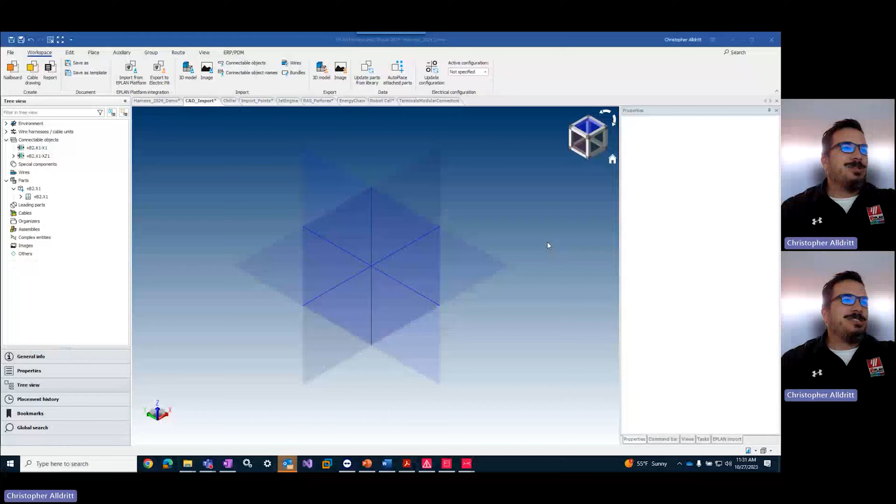So we'll start with the basics. When you start Harness, you start off with a nice blank space, and the first thing you want to do is import some CAD. So bring in a very simple CAD drawing, just a basic cube design. And we have our cube, our quad cube, and we want to start routing parts around inside of it. So we'll go and grab some parts.

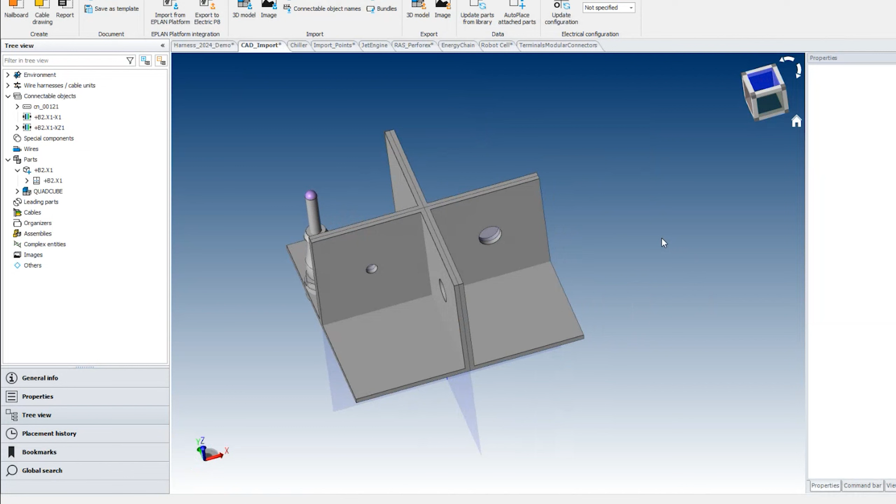Our library, which is connected to EPLAN's library, allows us to bring in parts directly from the data portal to P8 and then directly to Harness. And now with the advent of the LPM product, we can skip P8 altogether and bring in parts directly from the data portal to LPM. Wow. And then eventually to Harness. So we have this, and now we want to add a cable.

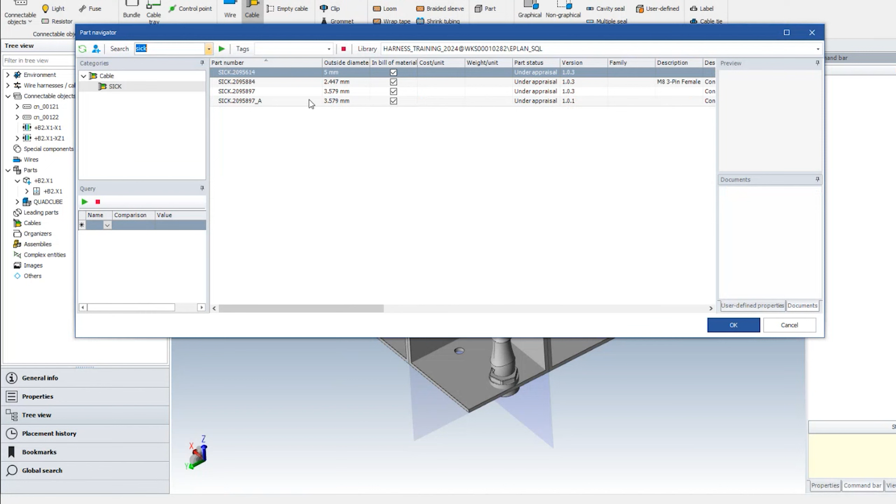Let's bring in a cable, place cable, and let's look for a nice SICK cable. Connect here, connect there. And so now we're immediately given a dialog asking us which wires on this connector side, what coded, which wires on this connector side. We've got brown, white, blue, and black attaching to the connector pins on both sides. Click OK, and now we've got a cable.

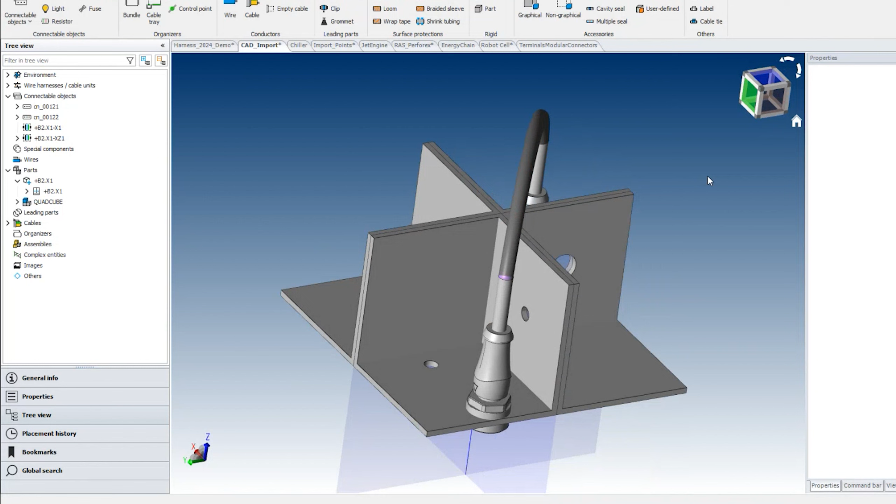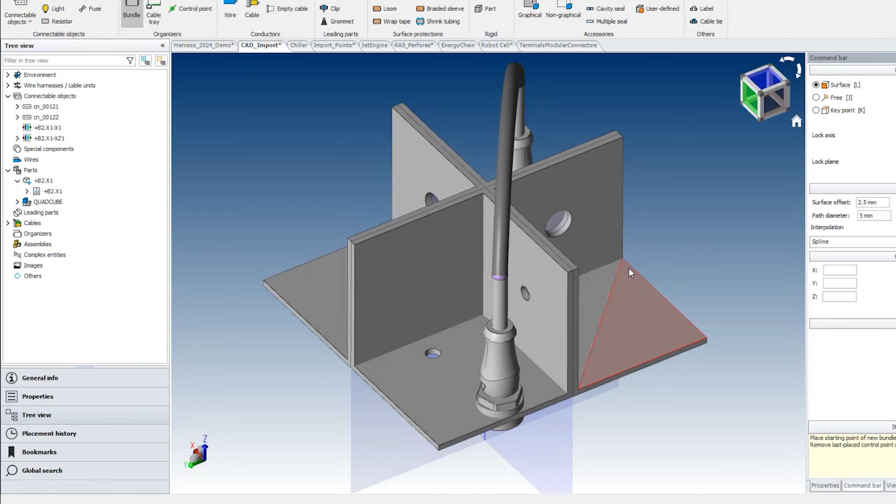That's wonderful, but now we eventually have to get it through all the twists and turns inside this little quad cube. So we'll introduce what's called a bundle. A bundle is a virtual path which allows us to guide our wires and cables. So we'll start with a bundle, and we'll place the first bundle point on the surface here and just work our way through the design. And then let's go way up and see. All right, so now I've created a very basic bundle.

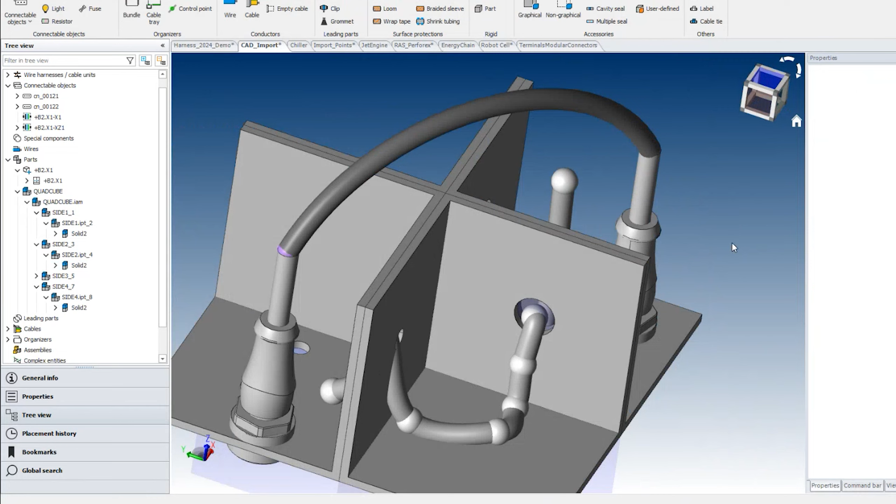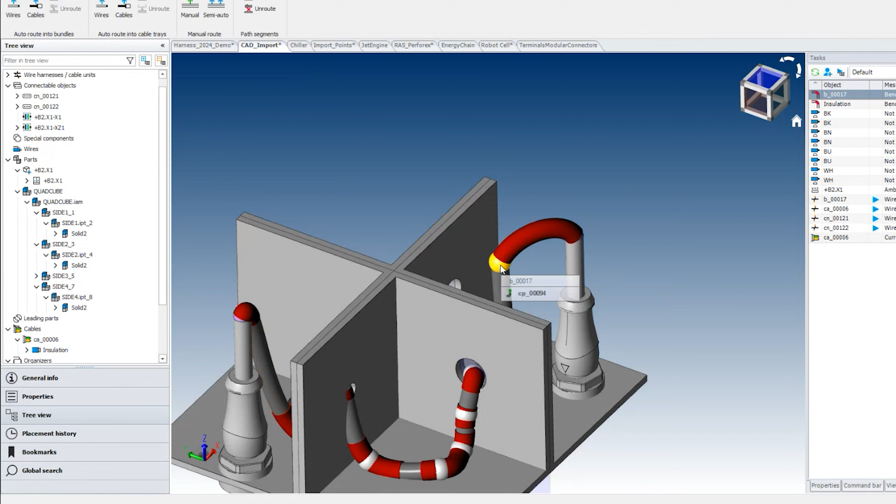So now we want to route this cable through that bundle shape. We'll go to the route and then just click auto route into bundles with a cable, and then it automatically links. Now, because I did this in a hurry, I've got a bunch of little errors telling me that I've exceeded the minimum bend radius of the cable, and I can tell that by going to tasks and running the task report: bend radius exceeded, not connected to any pin, not connected to any pin. Chris, you've done it all wrong. So you can go to each individual point and solve that by correcting pins, making sure that the red goes away. All right, so that is the very basics of Harness.

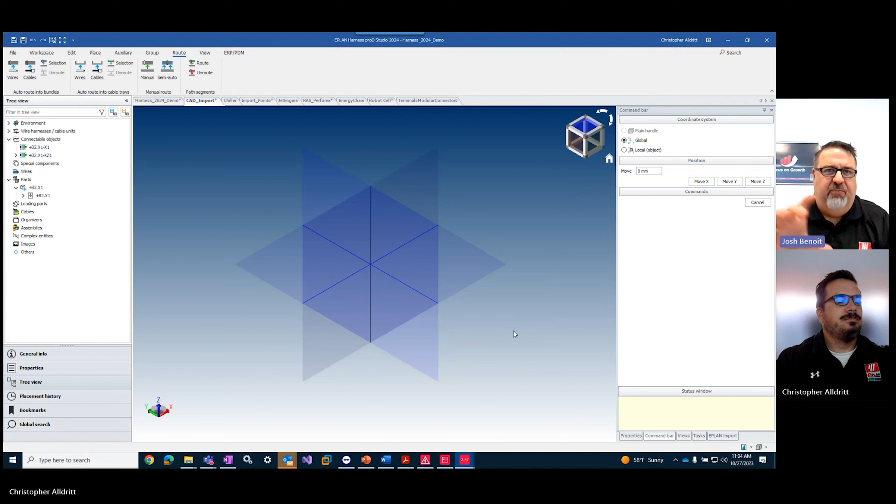So can I ask you this? Being a person that's never used Harness before, whenever you had those little points that you could pull up and down, are those automatically generated? Those points, I don't even know what they're called, but it seemed like that was the actual point where you can manipulate that wire. Are those automatically generated, or can you insert those in different places?

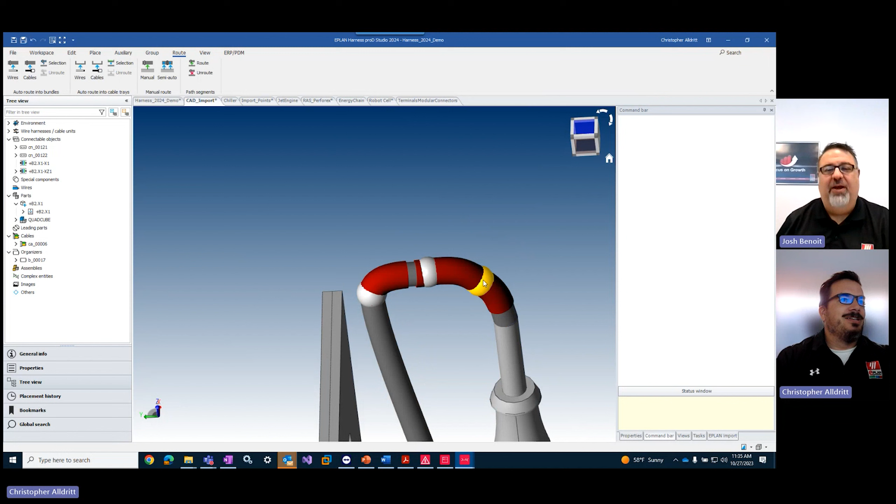Josh, I'm so glad you asked me that question. I cannot tell you how much. These are called control points, and you can add as many control points as you want to, and you can get an idea of where you are in space with the little online annotations that pop up, and you can drag and twist and run points everywhere.

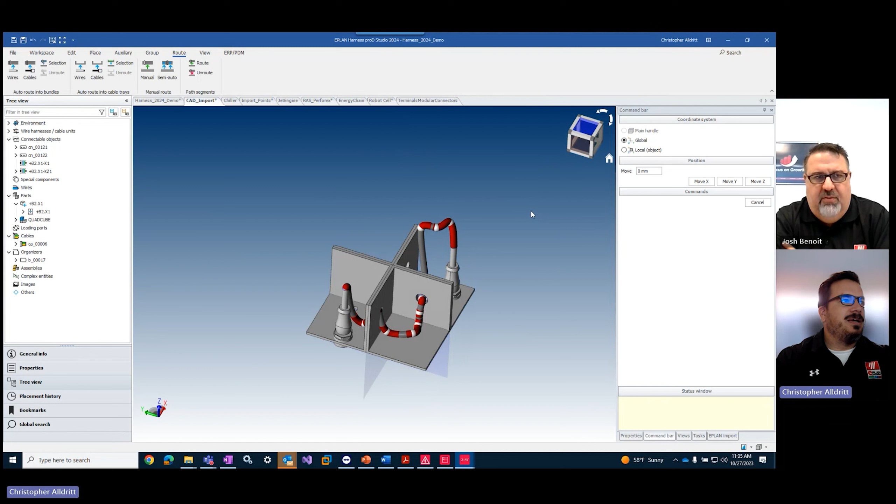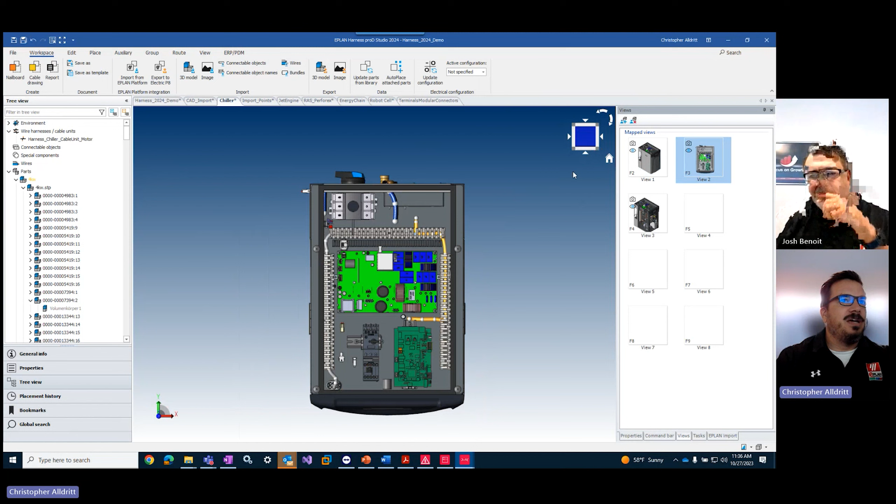Okay. So eventually what you're going to do is move on to something a little bit more sophisticated, like say a chiller unit. So we have a chiller unit here. And what we would like to do is run some cables through this chiller unit. To get a better look at this chiller unit, we'll access one of the views available to us. This is what it looks like from the top. And what I would like to do is run cable from here, down here, and eventually down to the motor.

Okay. So instead of using connectors from the library, what I'm going to ask Harness to do is link to an existing EPLAN project.

This is the ESS sample project harness chiller. So it's designed to make sure that I don't screw up. I'm going to defeat it anyways and probably embarrass myself. But to start out, we're going to take a look at the basics of what's going on inside this harness unit. So in EPLAN or P8, this is the P8 schematic program.

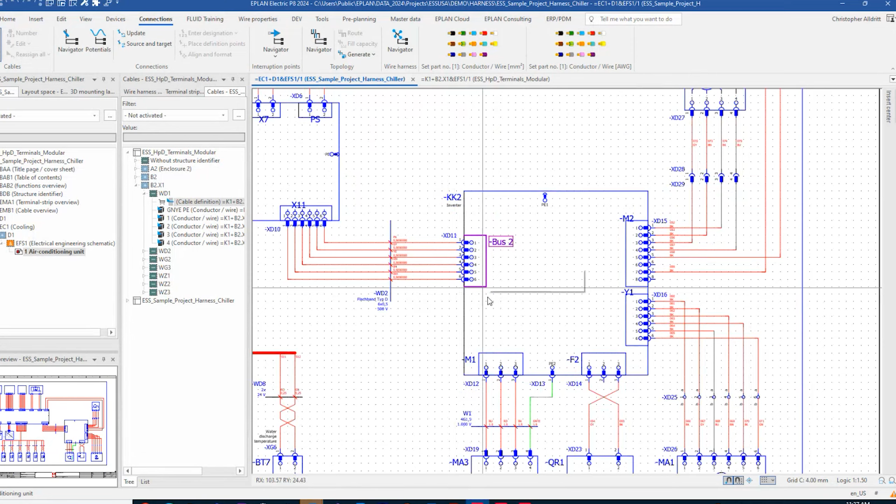We're going to connect this cable called W1 to XD19. That's this plug attached to the motor. To XD12, that is a connector attached to this power circuit board. And this little ring terminal here, you don't know it's a ring terminal yet, but it's a ring terminal connected to a ground.

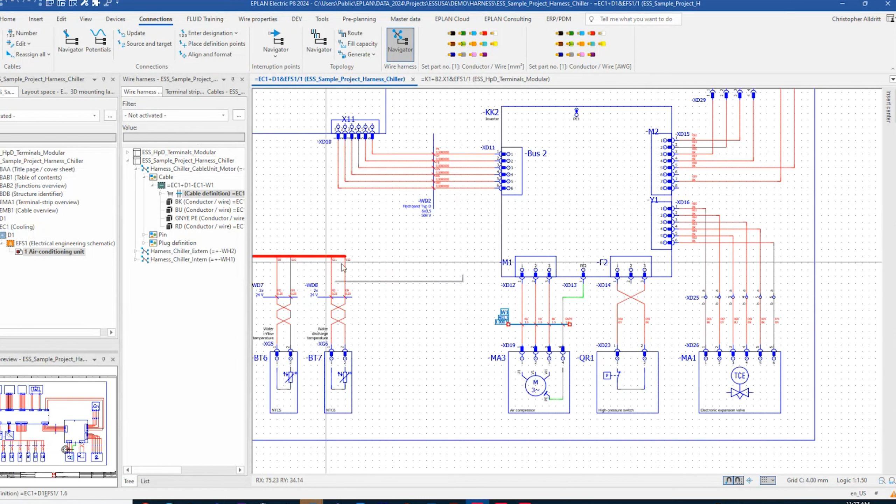And so what I did in advance was I linked all this stuff to this special dialog in P8 called wire harness dialog. Guess what that does? That takes all that information and sends it to the Harness studio product. So what we're going to do next is make sure that all these little individual devices, I'm not going to do them all, but all of these are linked back to that open EPLAN project.

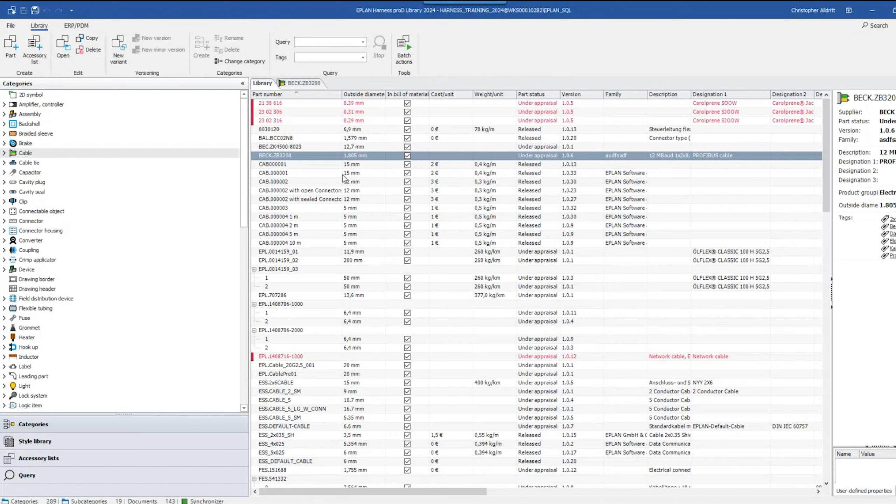And so when we bring a device, what this device is going to do is look for this product back to a parts library. This parts library is attached to the same parts library that anybody who uses P8 is familiar with, the parts management library driven by SQL or our eCloud product called eStock, and synchronizes those parts with a 3D representation, which if you're familiar with ProPanel, you've heard of the 3D macro.

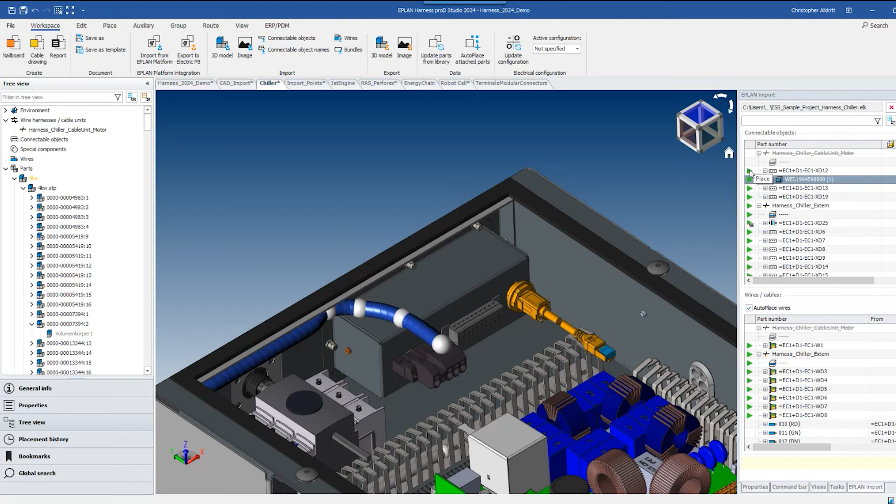And so the same 3D macro parts can be imported into Harness without really doing anything other than clicking import parts into Harness. So we're going to do that. Sorry, long-winded way of saying we're going to import XD12 or place XD12. So just click on this placement item and bring in XD12.

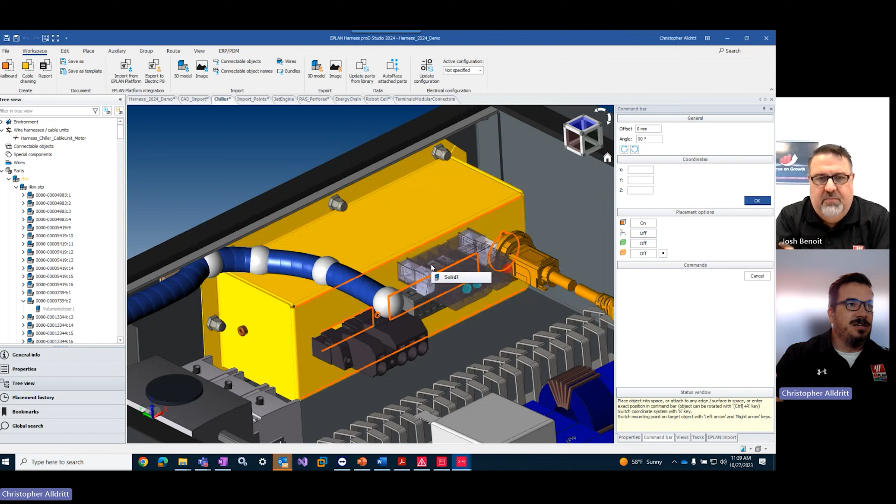Now I've cheated, naturally, because I like to cheat, and I placed a mock-up of what XD12 is supposed to look like. I can turn on and off these little switches. It'll give me a little bit of an easier time placing the connector. So I'll place the connector first here. I'll rotate it around. It's placed in the wrong way. And now I'll link it directly to where it's supposed to be.

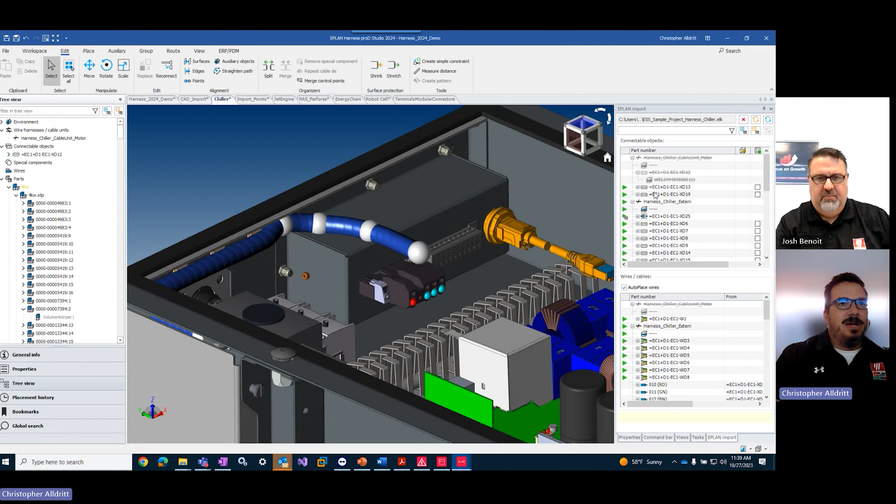Now in real life, of course, we can't cheat, and we'll have other items that'll help us along that we'll see later, called handles and points, et cetera. But for now, we placed XD12. So now we can work down and place XD13. XD13 is that little ring terminal I told you about. Remember this over here, XD13. Right.

So we'll go to this side and use this helpful little feature called an auxiliary coordinate system. So I'm going to turn off this surface and edges, turn this on. Too much technical talk, I know. But then I'm going to place this and it'll snap exactly to where it needs to be on the nut that would hold down a ring terminal. I'm going to rotate that. Let's orient to the right position.

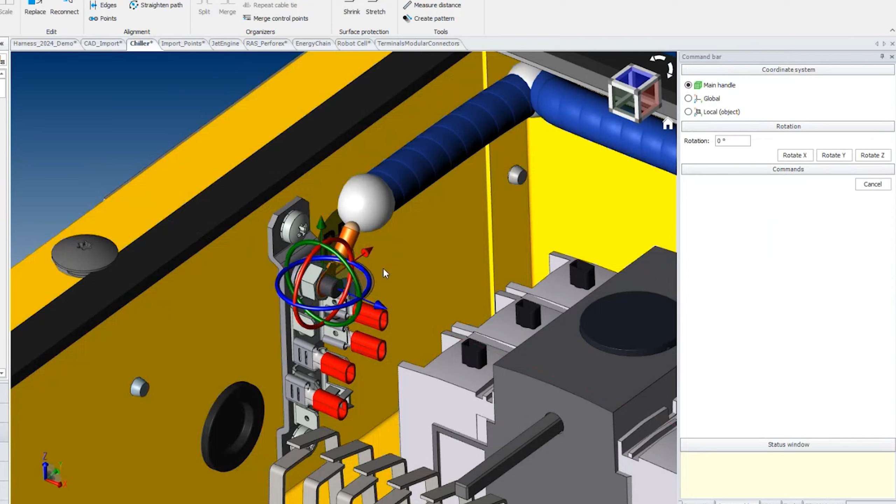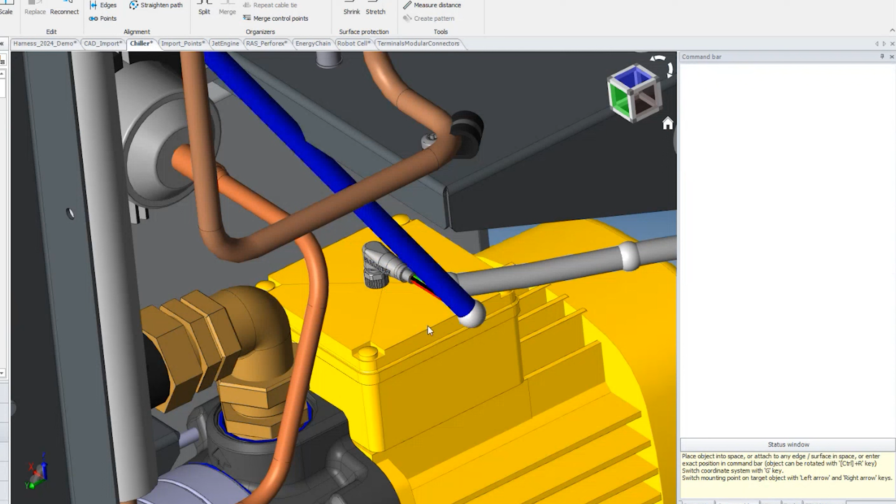And finally, our last thing to do is place what any electrical engineer will immediately point out is not an appropriate motor connector. I'm going to do it anyways, and place that directly on the surface of this box where it would never go. But the point is to show that the cable and all the connectors and everything else is automatically placed without having to run any sort of routes or doing any of that crazy stuff that we did beforehand.

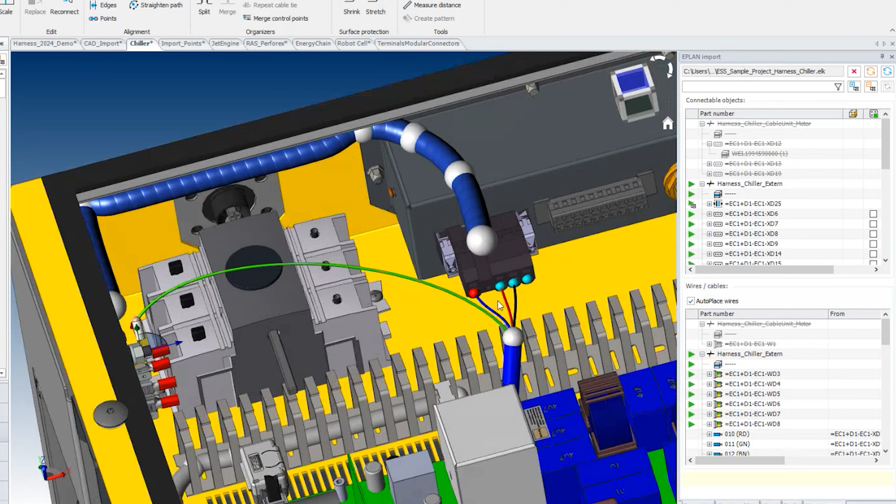It's all been placed automatically because EPLAN and Harness know that all the parts have these little individual connectors on them. Those were established on the P8 side, and now that stuff is linked over to the Harness side, and we don't have to do anything else. Except for maybe route this wire. So we'll route this wire using path segments and route it into this.

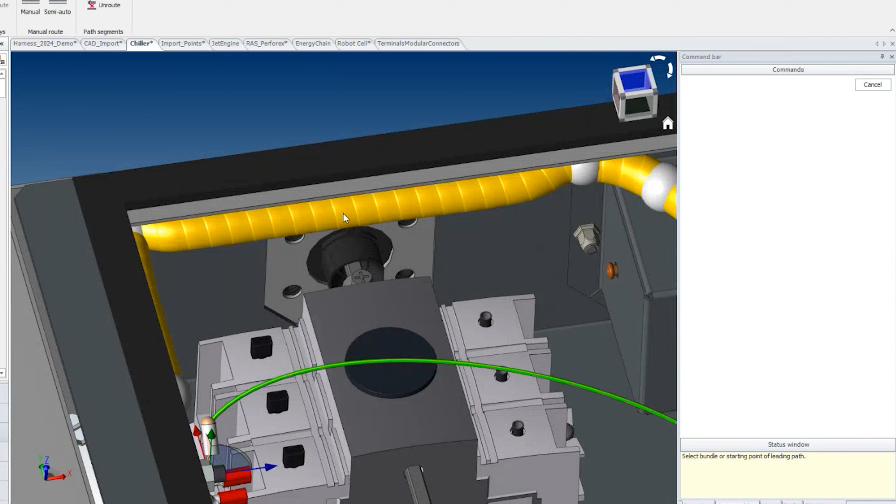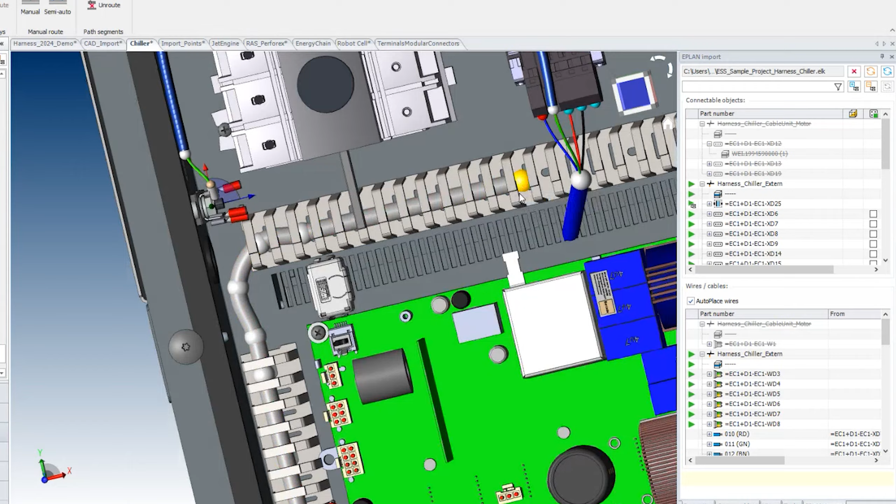Notice how all the connectors are already aligned with that. And then the only thing we have to do is route this cable. Now, Harness is smart enough to figure out that this cable would probably benefit by going into this particular bundle because the starting point here is close to that starting point there, and the starting point down here is close to that starting point down there.

So Harness does the math internally and figures out I should not go through this other route on this side. I should just go through this one. So all I have to do is just click auto route into bundles, and then it automatically routes it. So that is the link between the Harness ProD side and the existing P8 side.

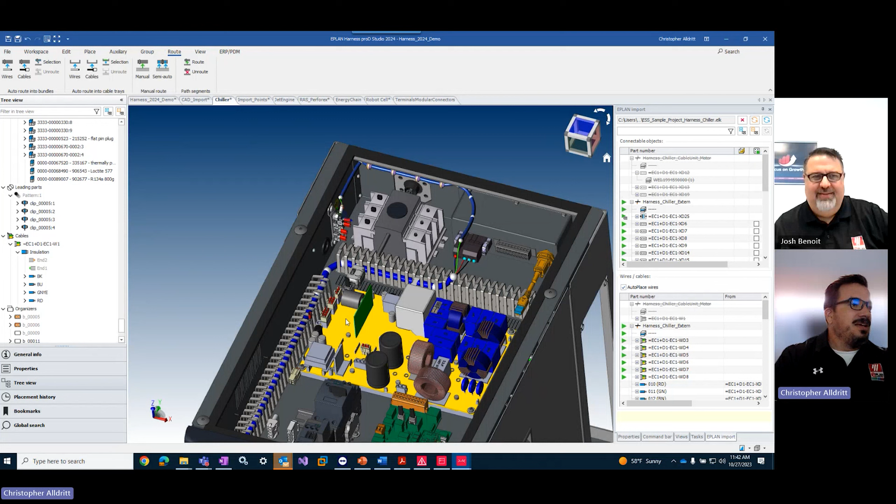It's extremely easy. And it looks like it's very intuitive, even. I mean, as assembly tools go, Harness is very intuitive. Use the benefit of a space mouse, of course, but any 3D mouse will work. And then everything else in terms of placing is pretty quick. It does not take a lot of time to learn Harness as opposed to maybe some other products.

But anyways, we're not done yet. We still have a feature that allows us to spit this out in something that somebody who doesn't have Harness can read. So what we'll do is we'll take this and we'll add it to a particular group called a cable unit. And if we have a cable unit, we can create a cable drawing and then spit that out into either a PDF or maybe plot it on a printer that somebody can use eventually to produce this harness.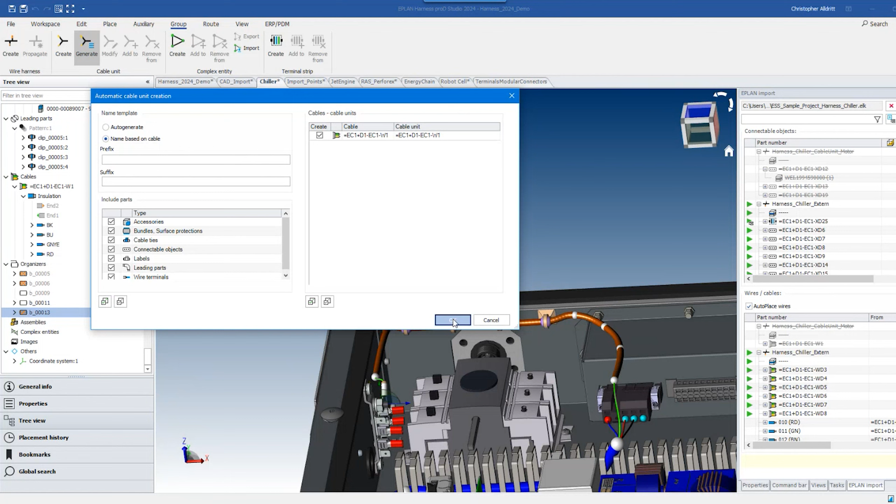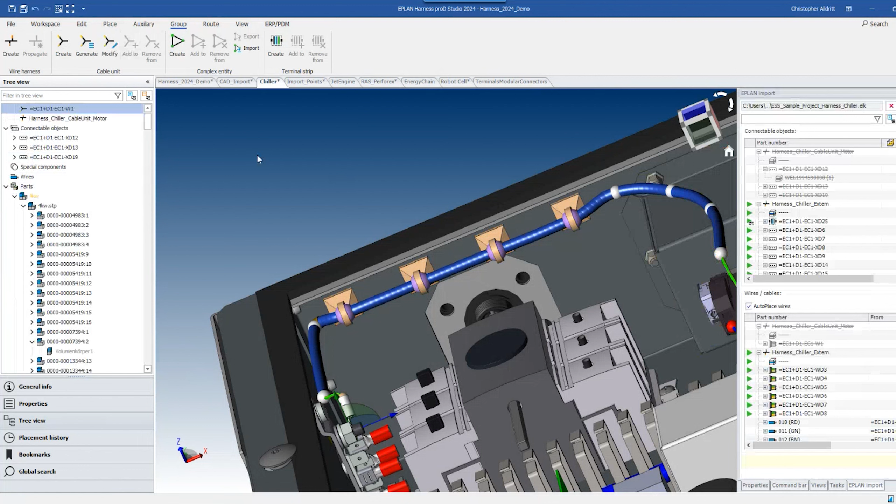So we'll click that, say that is now part of that cable unit, and we'll highlight to make sure we've got all the parts. Notice that everything I highlighted on this cable unit is now yellow, but I've missed a few. I missed these little clips, and I want to include those. So I'm going to add these to that overall cable unit. And now, click OK. And now when I select this cable unit, I can hide everything else. And now every component should be included on this cable unit.

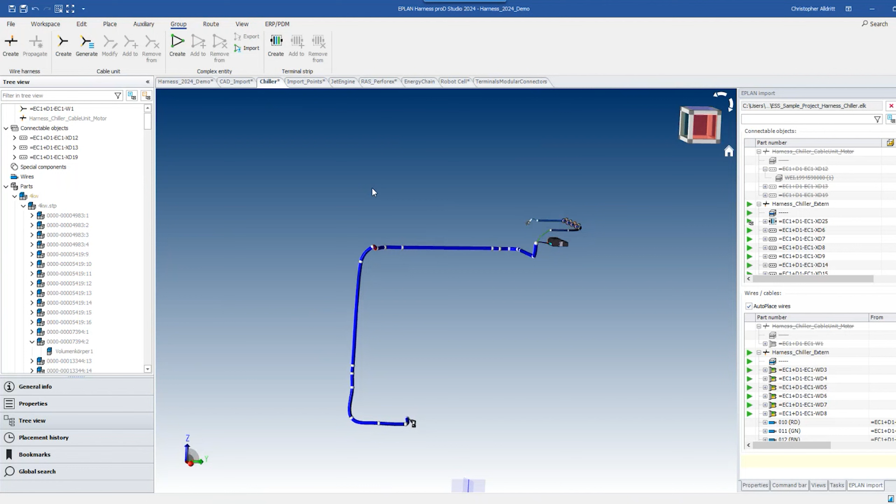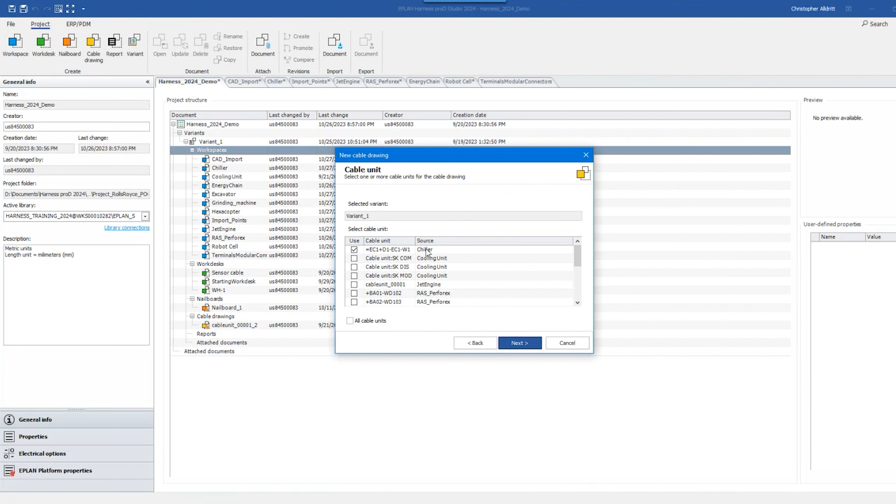And I can look at my harness overall, which is eventually what we want to flatten. So we want to take this and flatten it out onto a 2D drawing. So we'll do that next, just by clicking on, I want a cable drawing. And it'll ask us, what cable drawing do you want? I want it based on the name of the cable unit I gave in the last screen. I've got way too many, but fortunately it's the one up at the top, part of the chiller. And then I'll just pick the default configuration and I'll generate a cable drawing.

Double click on my cable drawing. And that's it. I've got a nice cable drawing with some very basic from-to information on both sides, and it's automatically dimensioned to the clips. This is why I included the clips, because I wanted to see the dimensions between each clip, and the cutoff length or stripping length between a connector and any pins. And you can also bring in other stuff. If I wanted a bill of materials, bring that in. If I wanted to see surface protections, I could bring that table in, and it's automatic and always updates based on whatever is inside the drawing.

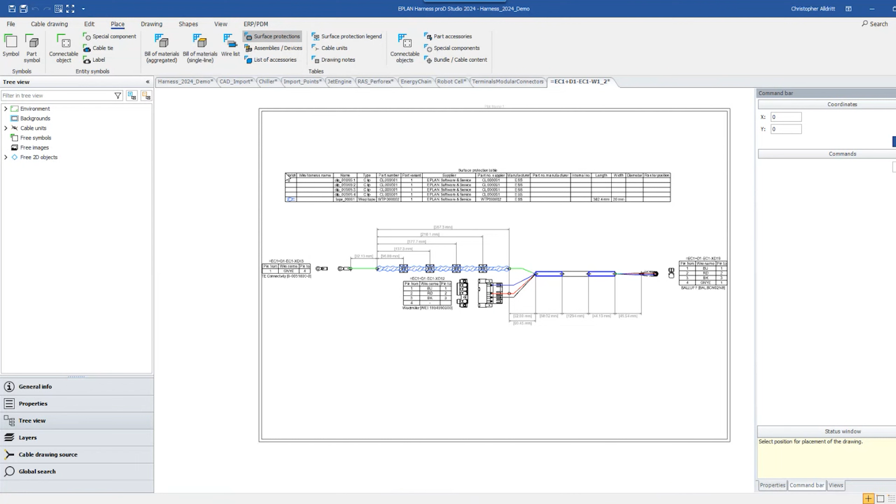If I changed anything and I want to go back, like a lot of our other products, you can right click and go to my source. I'll see where my product is. Zoom in. That's what I want out of a harness tool.

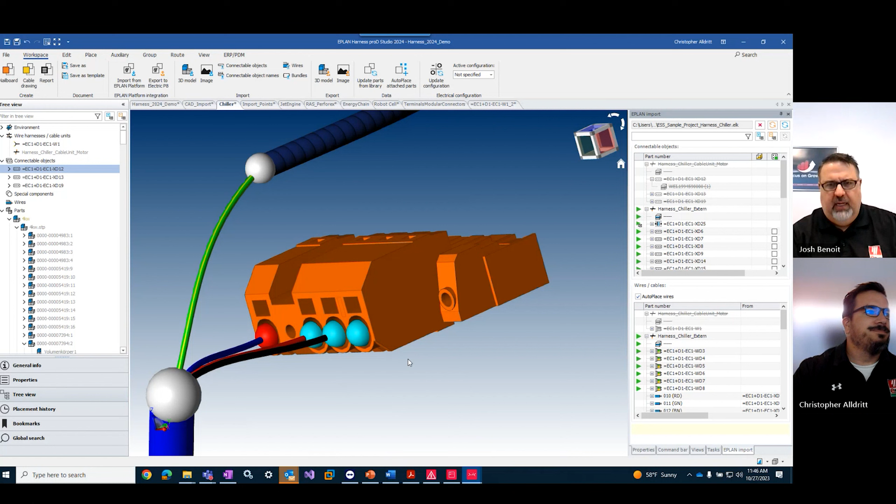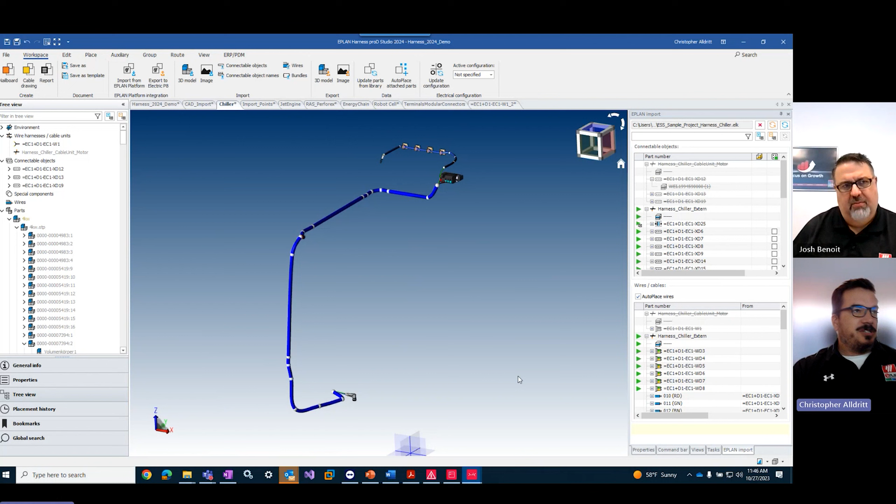How much time saving is this as compared to the way it was done before? Because not only is this, like I said earlier, intuitive, the intuitive nature of it makes it faster, but overall it's really a whole lot easier to understand if you're new to this part of the business. Okay, so, gonna show my age here, but one of the things that I had to do way back when I was a very small engineer was create cable drawings like this.

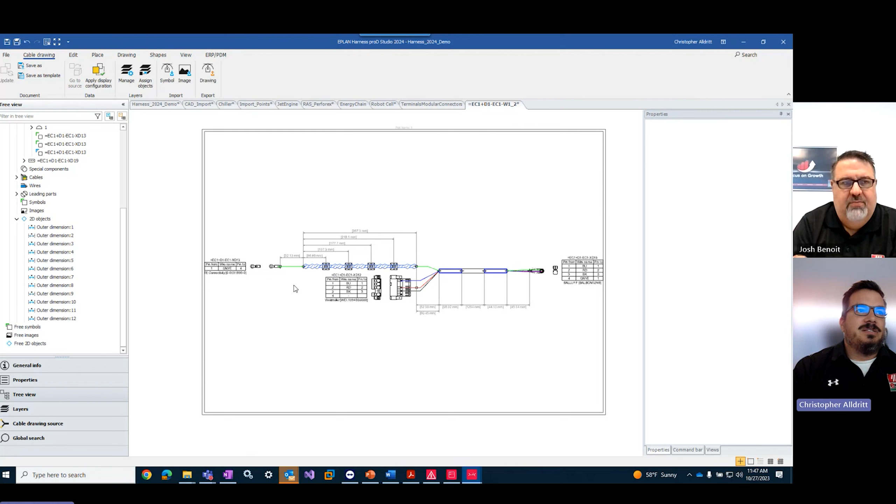And to create each cable drawing, first of all, you start out with a basis point somewhere, and then you would say, okay, from this point to that point, how far is it? So my options were to go out and look at the CAD, if the 3D CAD existed and the mechanical engineers bothered to even place a harness inside their 3D CAD. Odds are they didn't, because they didn't care, because it's electrical people's fault. And then from there, if I didn't have that, then I would actually go out to the machine.

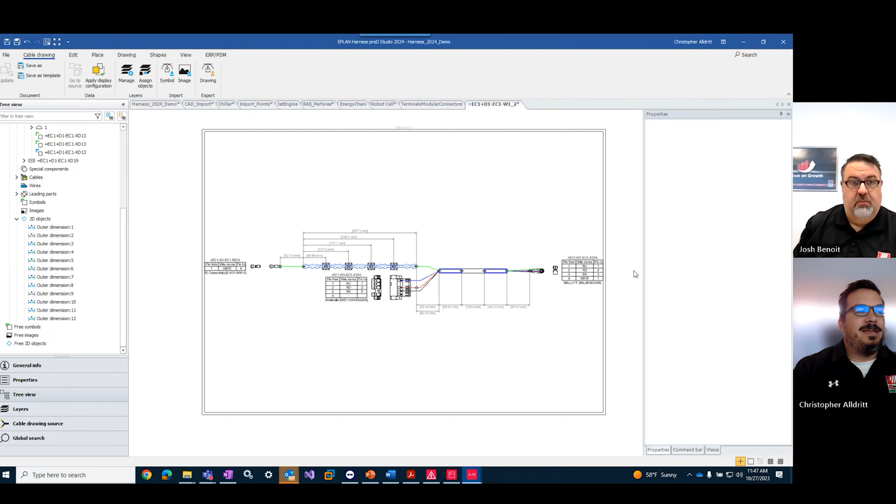I'm not joking. I would go out to the machine and measure each little segment, write that down, and then come back and then create my dimensions based off of that. And so I would take lots of pictures. And so a cable drawing like this, just this simple cable, would probably take me closer to 45 minutes, because I would have to have a machine that was in assembly and had been routed. The old style way, if we were too long, we would have the assemblers just wrap the remaining cable in loops. If we were too short, well, that was a problem.

I know these things. But anyways, if you had to figure out where all the cables were running, you had to go and find a system that was in mid-assembly and just measure the lengths. You couldn't necessarily take anybody's work apart, but you would have to get an accurate measure, and then you would always add a fudge factor of like 1.25 as a good rule of thumb, and then translate all that back to that drawing that we just saw.

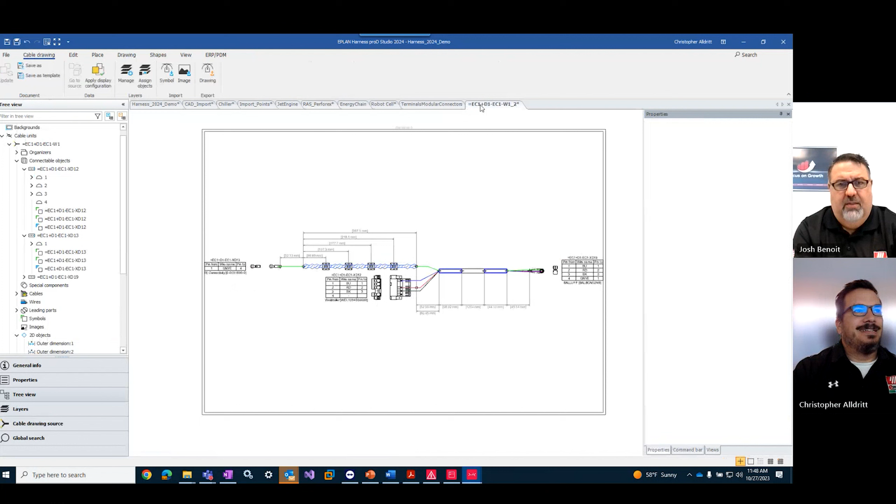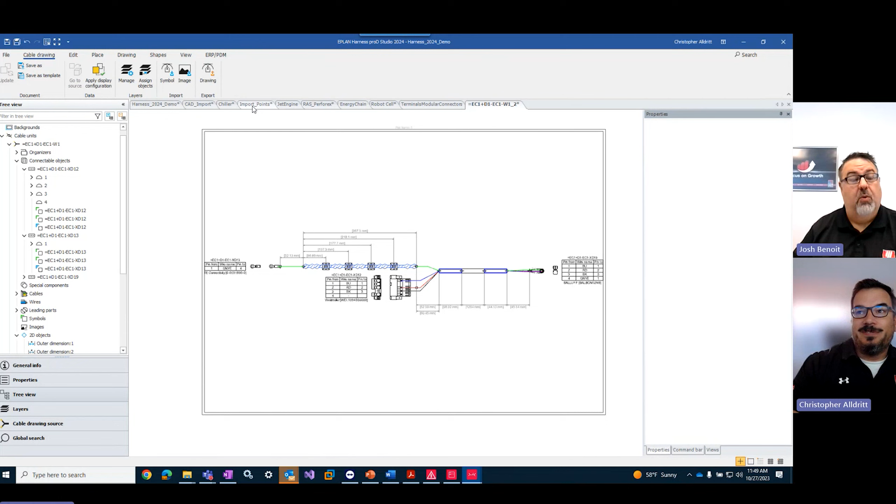There had to be a lot of error correction also. I know that this gives you an exact length, but there was more waste at that point with wiring, right? Yes, a lot. And more often than not, you would fudge in a direction that wouldn't get you screamed at. So if 1.25 came across as too tight, then you would add 1.75, and that 75% begins to add up in terms of actual money. And that is like the worst case, yes, of course. And then as you honed in, you would get better and better.

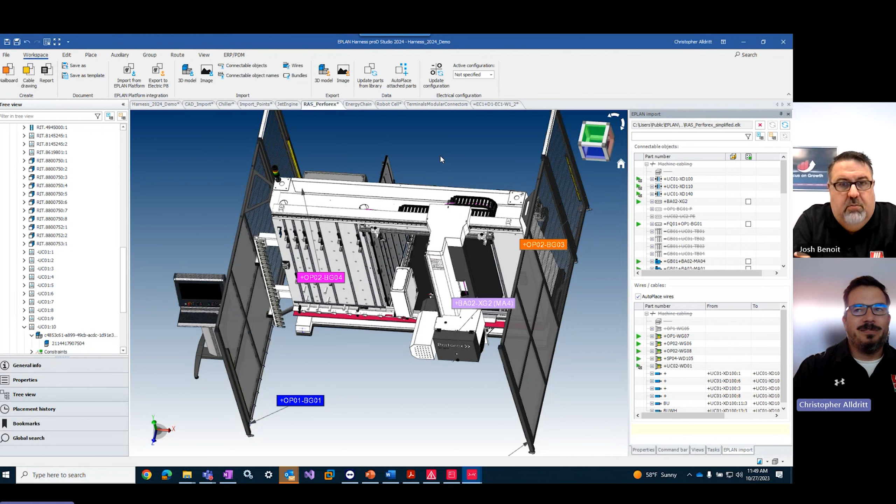And then eventually towards the end of, say, a prototype, if you were lucky, you would have one machine that was completely wired, and then you would take all the wires off and then measure all those lengths. And then you would have a true length of every single cable and every single wire harness on a machine. Yeah, a lot of work.

I think there was a study done recently about excessive material from wire harnesses in automobiles. It was measured in the kilometers. Whoa. So figure kilometers. I mean, granted, these are very teeny tiny wires, because they're controlling all the myriad sensors that are around a vehicle, but kilometers of extra wire inside of a car. The extra weight, the extra cost.

Yeah, anyway. From someone that's not inside the industry, and I don't know anything about wiring and the effects of temperature on wiring, do you have to allow for some kind of wiggle room for wires that are going to be mostly in the sun as opposed to those that'll be in a colder climate? Yeah, you do have to allow. I mean, the wires will get derated as temperature increases, and so the derating will have an effect on things like the size of the conduit, because if you have to derate a wire, then you have to accommodate for that derating. When I say derating, I mean things like voltage drop.

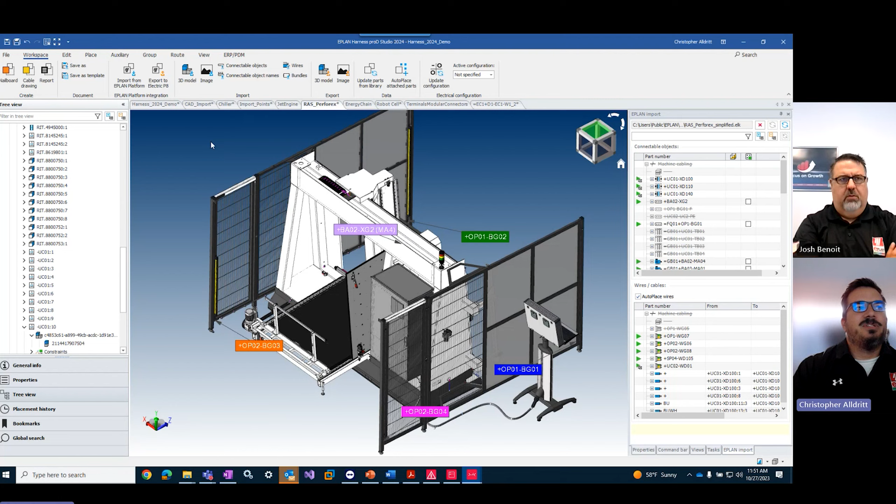In other words, if you wanted to get a signal from, say, a sensor down here on this chassis, and you had to route it all the way up and all the way down eventually until it got into this box. Extreme case. But if it was in a conduit with other wires, there is a limit to how many wires you can put into a conduit before you have to derate them.

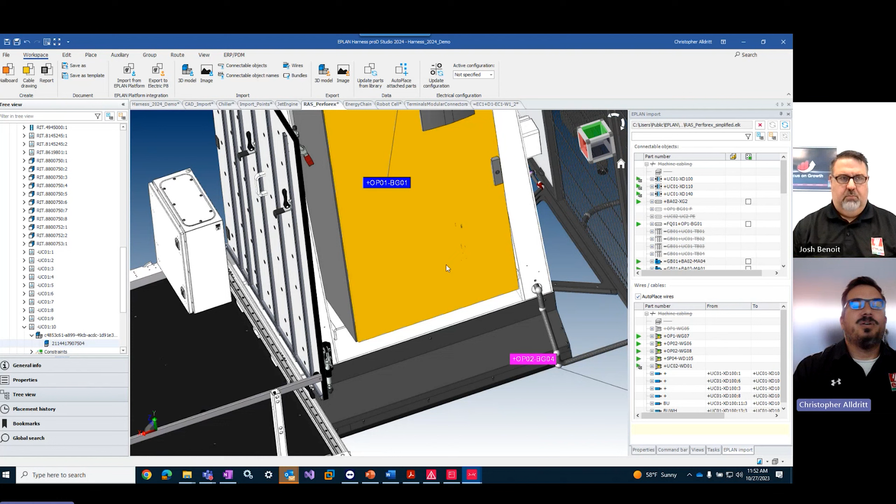And when you derate them, that usually means that there is not sufficient voltage to actuate a device or trigger a sensor or trigger a PLC going from 1 to 0 or 0 to 1. And that means that you have to increase the gauge or increase the conduit, resulting in larger cost.

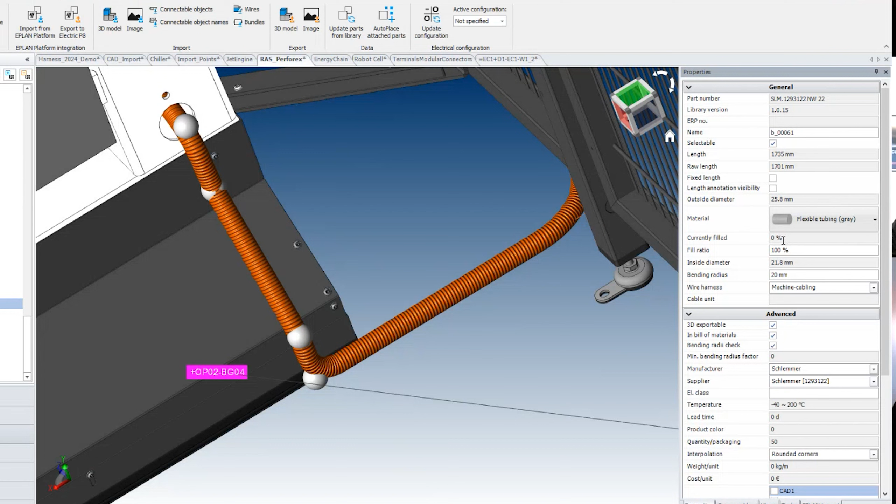And that can be calculated in harness? The size of the conduit? Yes. So every conduit or every bundle in harness has the ability, let's see if it'll bring it up, to establish a fill ratio. So right now this is an empty one, so it's currently filled at 0%. Fill ratio is 100%. But if we would go on to another harness, in fact, we can do an example with an energy chain.

An energy chain that you see right here is a series of interlocked plastic and metal crossbars that allow for linear motion along an axis. And so you lay as many individual cables and harnesses and surround them with protective material so you can bring either signal or power to a moving device.

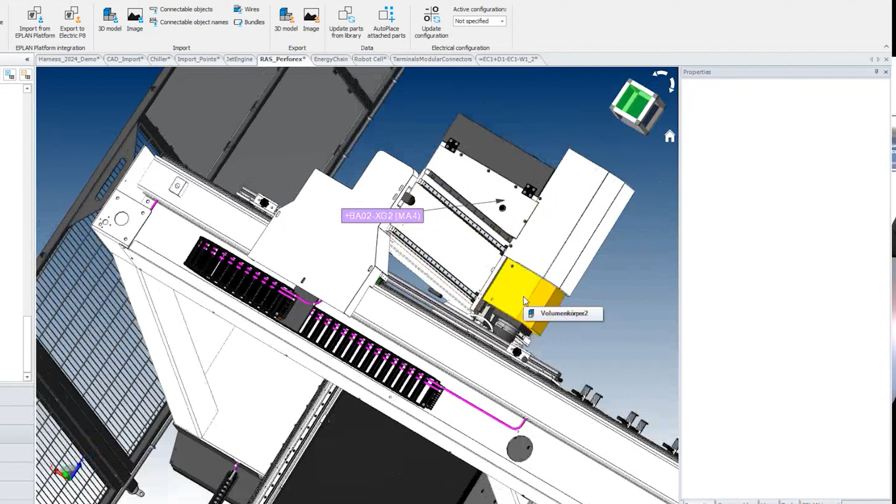And so to tie that in with what you were asking about, promise I wasn't trying to avoid the question, we'll go into something called the energy chain, and we'll talk about yet another feature in harness. This is a new feature in harness that was upgraded from 2023 called the cable tray.

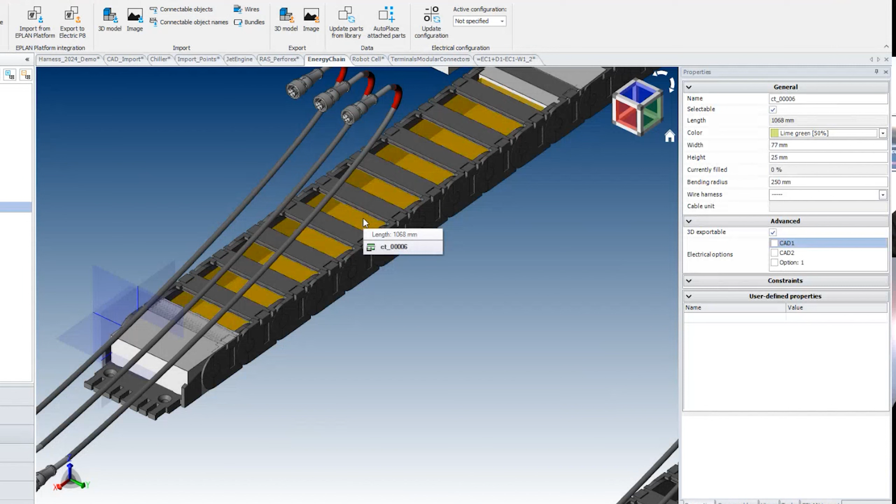And so a cable tray can be used inside of an energy chain because we're not limited to rigid pieces of material inside harness. We can do whatever we want. So we can establish basically a rectangular bundle. And when we do that, we can establish fill ratio. So what I'm going to do is I'll build a basic cable tray.

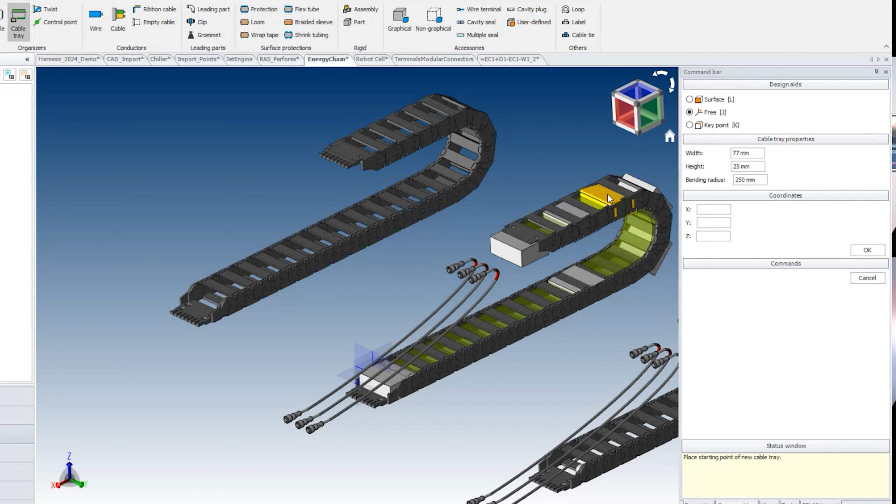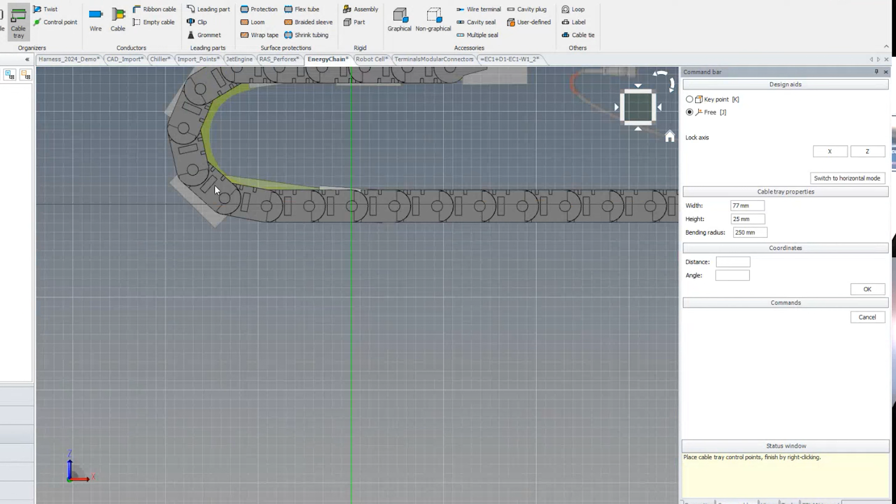Let's see, it's the width, right? Yeah, it looks okay. And we'll place that thereabouts. And we'll lock our axis of X and bring this over to this side. Place one connection point, then switch to vertical mode. Going vertical, Josh. And finally end here. Now let's notice that the fill ratio right now is still 0%, but let's add in these cables.

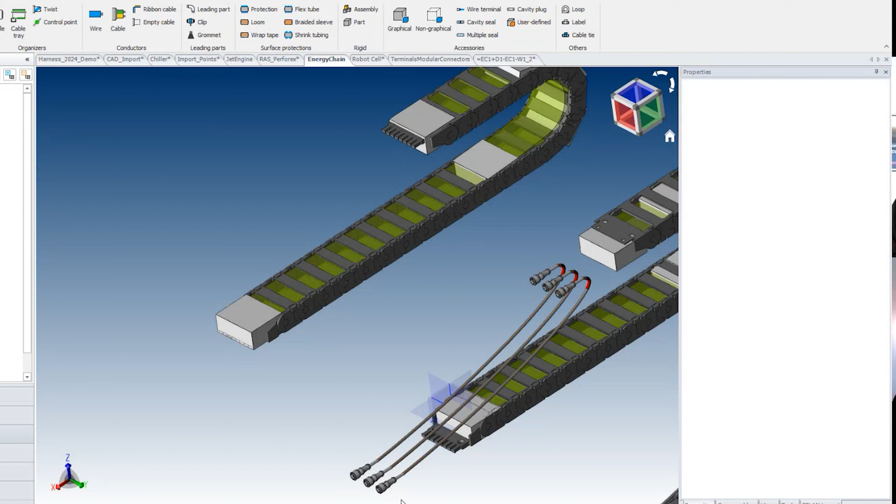Is there a suggested fill ratio for those? I mean, it can't be 100%, can it? No, it's closer to around, depending on whether it's dynamic or static, and these energy chains will all be dynamic, so it's probably around 70%. Okay. Let's create a quick copy and move that over.

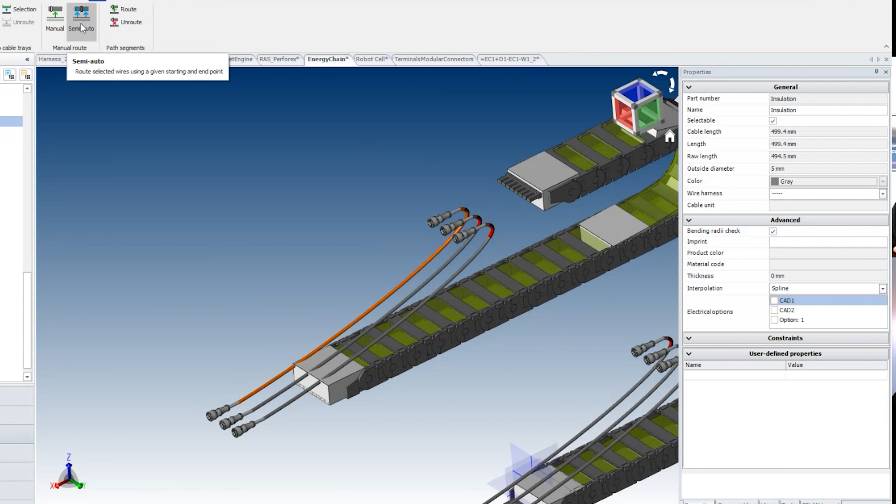And now we can route this cable through this energy chain, like this, there and there. And now our energy chain is routed, our cable tray is routed, and now the fill ratio goes up to 1.02%. It's possible to select all three of those and route them at the same time?

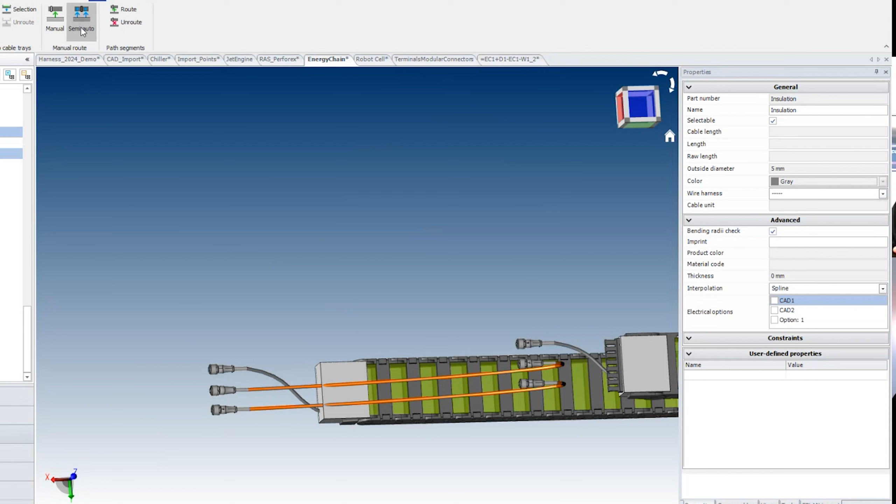Yes, you can. Okay. So again, just a much more efficient way of doing it. Yeah, I just wanted to show one. But yeah, it's the same set of commands, auto route or semi-auto route. I don't want to do auto route because that'll grab everything, but let's just route here and then there, and now they're all routing. And now the fill ratio is going to increase.

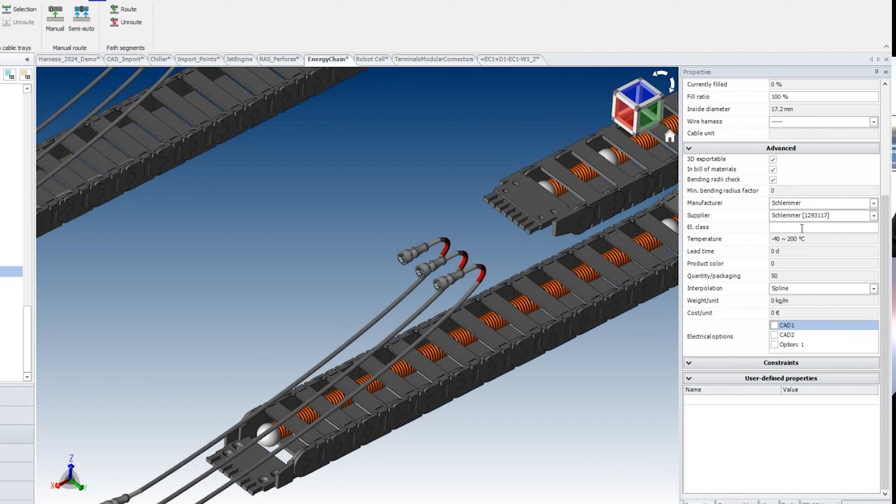What you can also do inside of the cable tray feature is you can add in bundles. So you can add a bundle to a cable tray. And if you do that, the bundle has the ability to create specific classes, electrical classes. And so you can route different types of cable. That way you can separate your signal from your power by routing this group of wire or this group of cables through this particular bundle.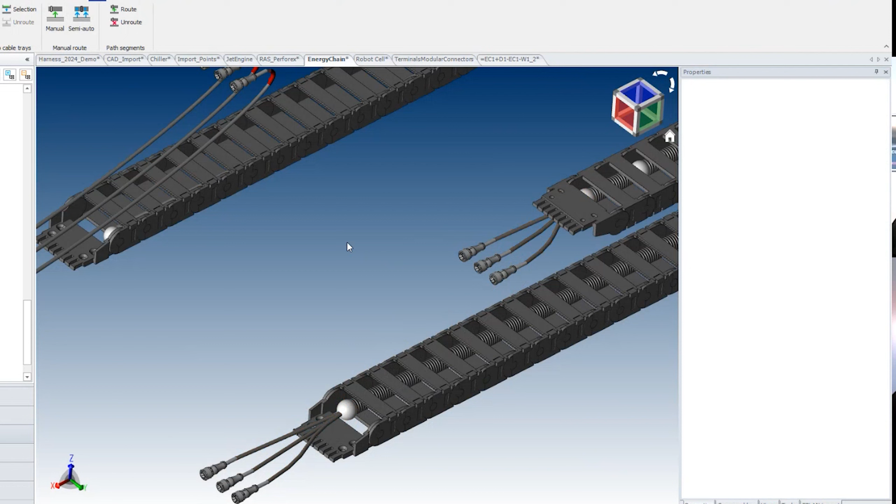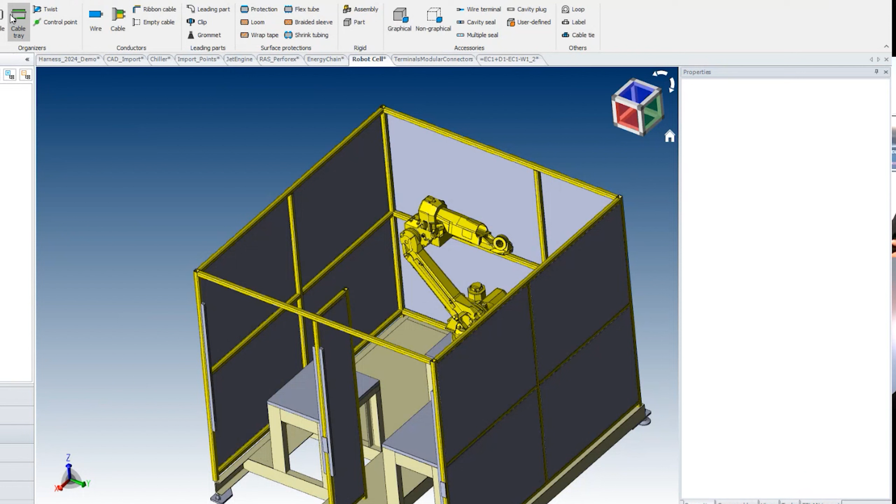And then of course you can use the cable tray again in the traditional way and just route a cable tray for use maybe in a cell. So if we create a cable tray here, we can start here, click this surface and start a route here, lock ourselves into X, and then route ourselves along.

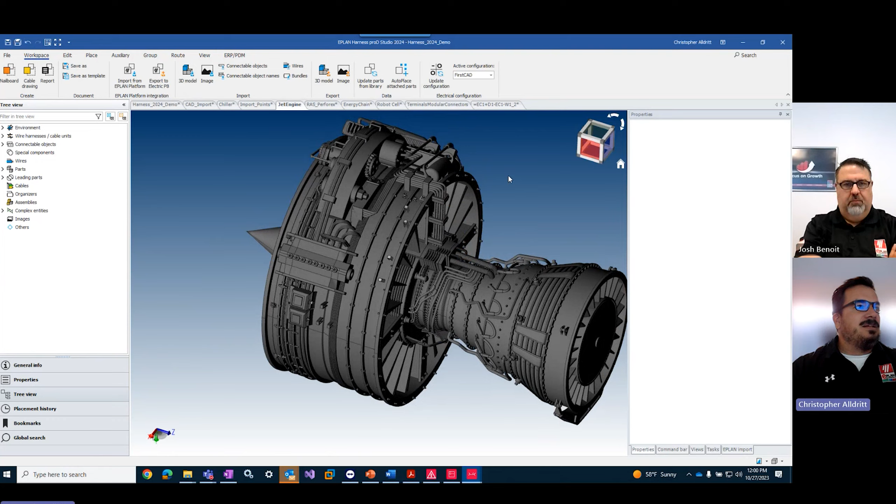One of the things I wanted to show came about because of a recent curiosity about how to better incorporate harness with mechanical design. A lot of times the mechanical designs get incredibly complicated and they are apt to change a lot. So even the simplest little changes can have pretty significant effects on the overall design, not just electrically, but mechanically.

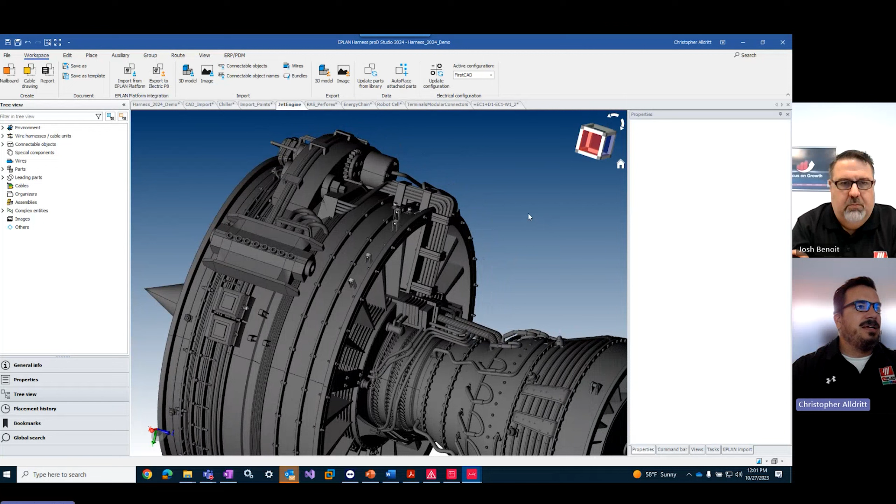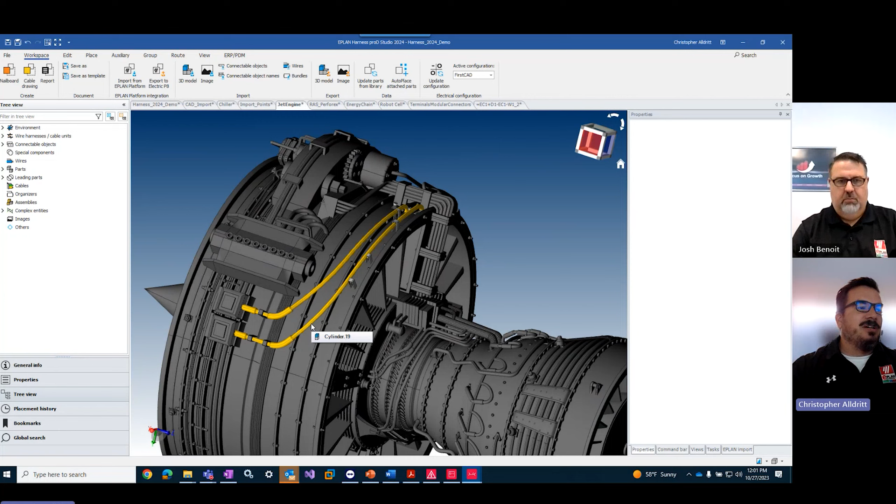So I was asked if it's possible to just do the harness design solely on the mechanical side: if you have some basic paths that you'd like to show and represent those on the mechanical side, how would you do it? Well, if you export this information, you can get a neutral file, either a STEP file or VRML, and in that file, and I won't show the file, there are a ton of little control points. And if you parse those control points, eventually you can design from those control points.

So if we imagine that we're working on the mechanical side, and we've created the basic layout of a harness, and then we send that to the electrical designer who has Harness and say, okay, go nuts. What the electrical designer can do is then just import the points. So we go to bundles and then we'll pull in a set of points.

Pretty easy format. It can be done in a CSV or just a text file, and we'll just address the points. So we've got our set of points. You can call them whatever you want, and Harness will understand them, but you need the XYZ coordinates. That's what you get from the STEP file. So normally you would export that off to Harness. But if you just want to export the control points, set that file up to just bring in the points.

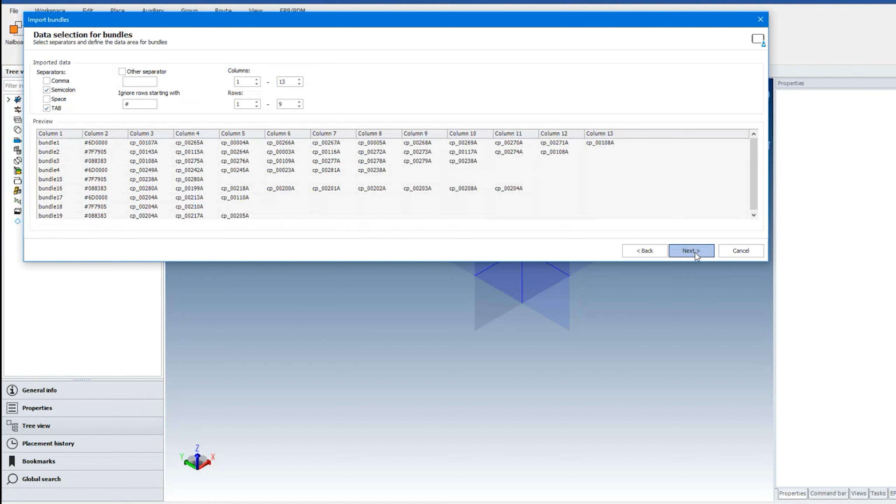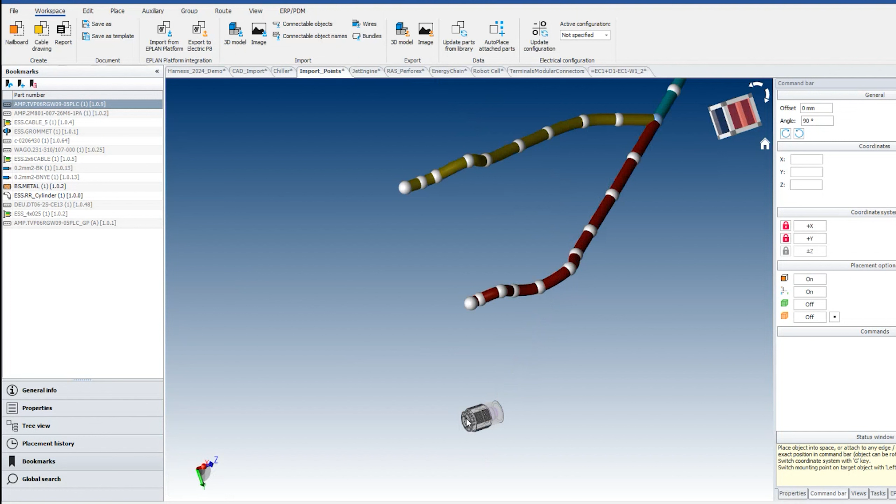And then on the Harness side, we can adopt them into bundles. And then we've got a set of points that we can then use to place our connectors. So if this is our harness, or this is what the mechanical designer sees, we can then bring in our connectors as usual and place those. I'll place a few of these. Just place them there, and adjust later.

And then say the mechanical design changes, and there's that subtle little change that we talked about, and the CAD goes from this style, and if we zoom in, we'll see the changes, to this style, and all these little anchor points have changed. Not exactly a big change, but it can affect the path of the harness, and we don't necessarily want to have to deal with all that.

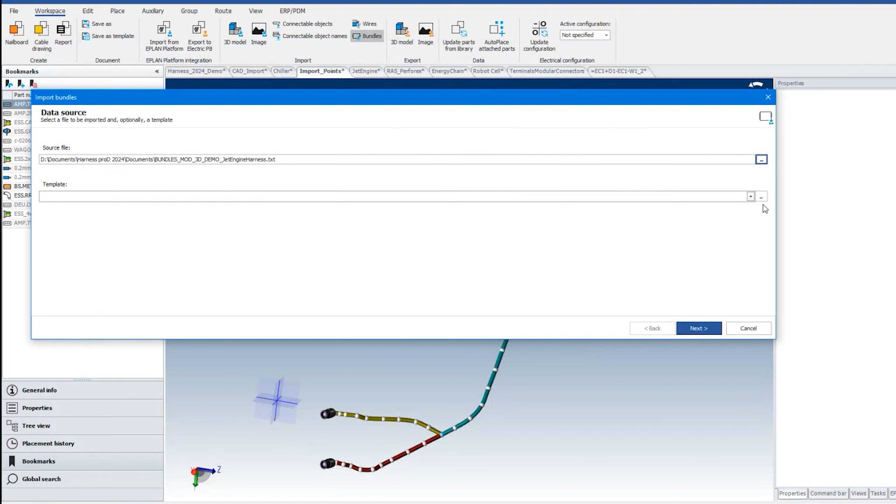So we can just bring in the new set of points and see those changes without getting distracted by any of the excess CAD or having to worry about the additional STEP files. And now they've changed, and now they're just pushed over, very small change.

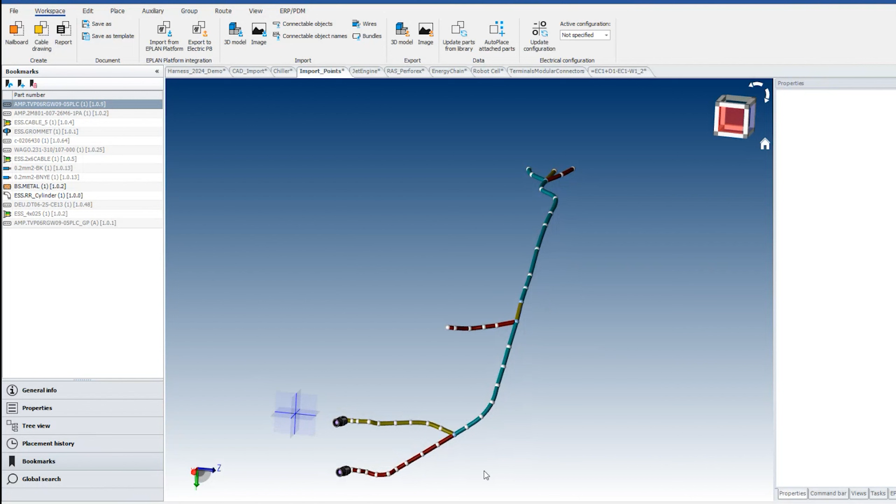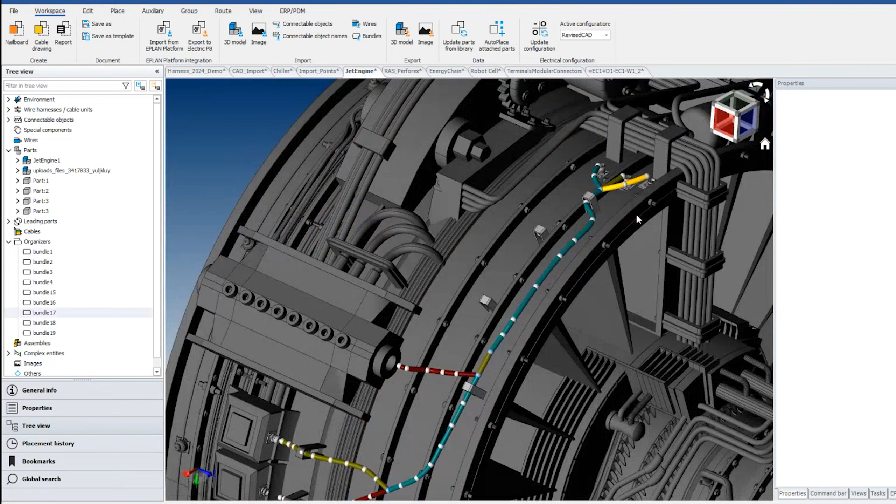Then on the harness side, once this design is finalized, we can go to the actual final design CAD, and then we can just bring in the same set of points to our CAD model. And then the points all line up. And once we have that, we can either place our connector parts or bring them in a similar fashion. And then all of our connectors line up, and they're all exactly where they are supposed to be.

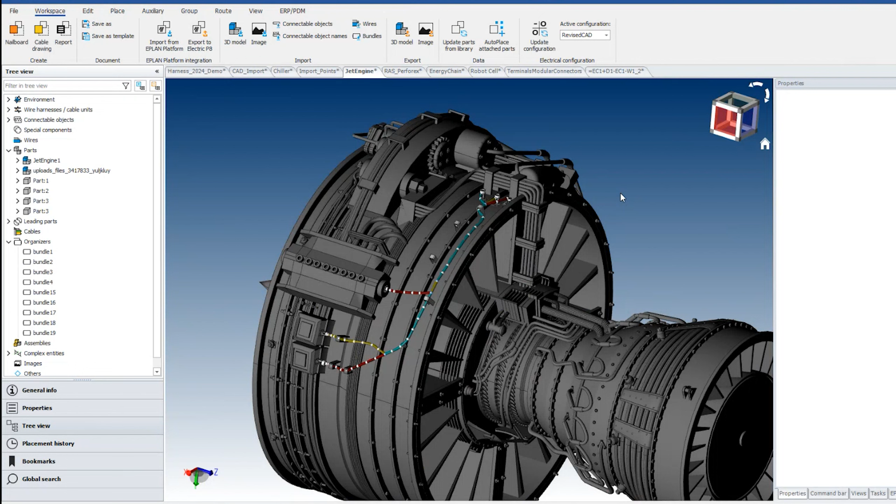And so that is a method that both mechanical and electrical can use to coordinate between their various designs without having to use the entire massively complicated assembly or 3D geometry, and work just on the stuff that matters.

So I know that we covered some of the Platform 2024 parts, the changes that they had going into this new generation of EPLAN. Yeah. And I'm actually going to post the link to our website where you can see some of those for yourself. But this is actually very, very cool information.